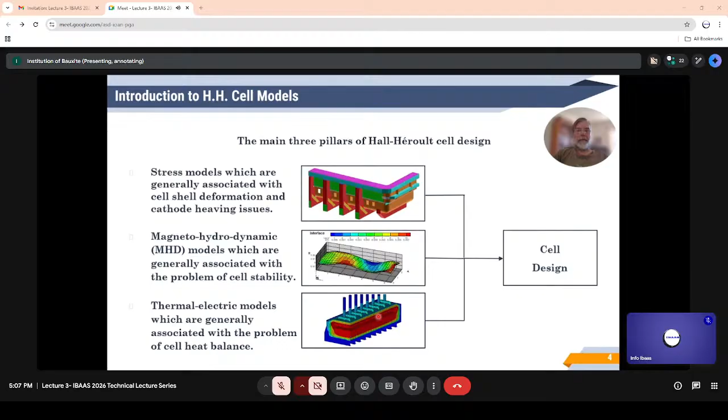And also when we're creeping the amperage, normally we have to design the cell appropriately, the lining design, so that the ledge is remaining at the optimum position. Too much ledge is not good for cell stability, as the ledge tends to get under the anode, and not enough ledge means that we have a risk of having a red sidewall and eventually losing the cell through the sidewall. So those are the two main issues we want to address.

So the stability of the cell, so the noise level or the intensity of the voltage fluctuation, and the second one is the thermal balance to achieve a proper protection of the sidewall without having excessive ledge toe.

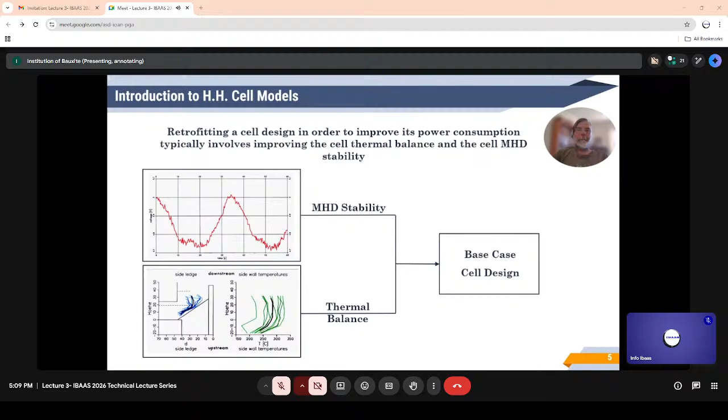And this is done with again the same two types of model, the MHD cell stability. So in my case, what I'm offering is the code MHD Valdis. And then the thermoelectric thermal balance model that in my case is based on ANSYS. And I will start soon to display the full series of models available.

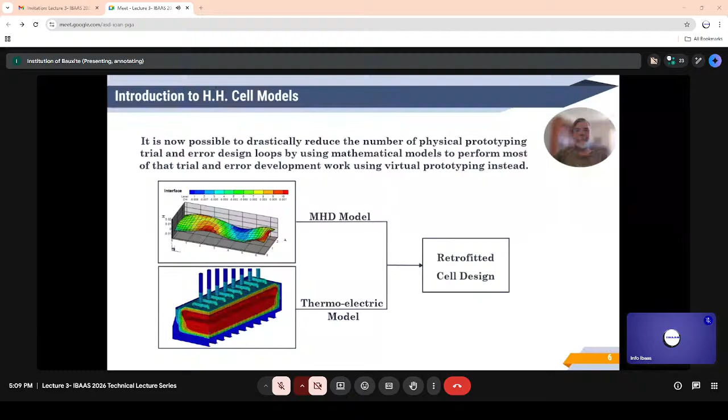So on the thermoelectric models, there are two big classes. There are the cell simulators. So Dyna/Marc is the code I have developed that I'm offering for simulating the dynamic behavior of the complete cell. And then there are those finite element based models, ANSYS is the name of the software, that are thermoelectric and are used to predict the anode voltage drop, the cathode voltage drop, the ledge profile, and the total cell heat loss.

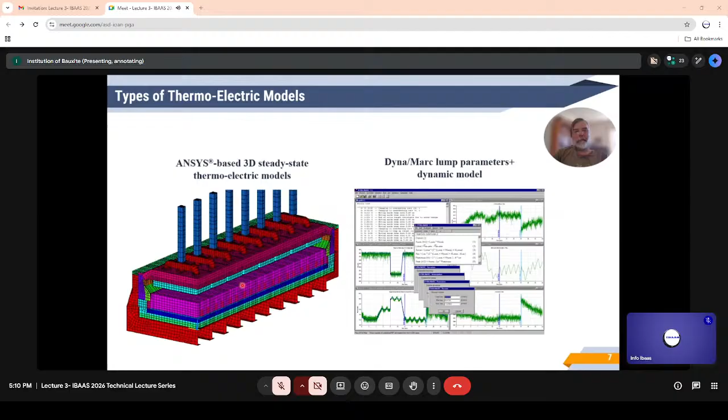So Dyna/Marc description is as follows. Dyna/Marc is a software whose core is coded in Fortran. That is a scientific language for coding equations. So there's a set of equations representing the process behavior. So equations to compute the cell voltage and then the cell heat loss. And the mass balance also, because we are feeding alumina, we are making metal, we are adding other material, changing anodes.

And the decision on when to move the anode to adjust the cell voltage is handled by the controller model, that is a coding of a cell controller, essentially. And then finally, there's an operator model where we decide when to tap metal, when to change anode. And all those three sub-models of Dyna/Marc are interacting with each other to be able to simulate the operation of a cell over a period of days or weeks, depending on how long we want to run the simulation.

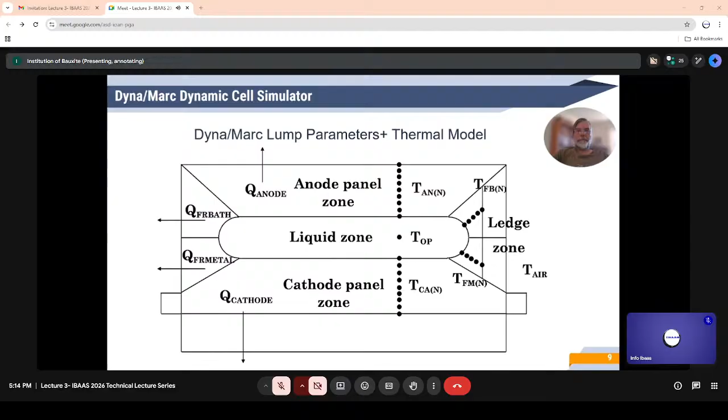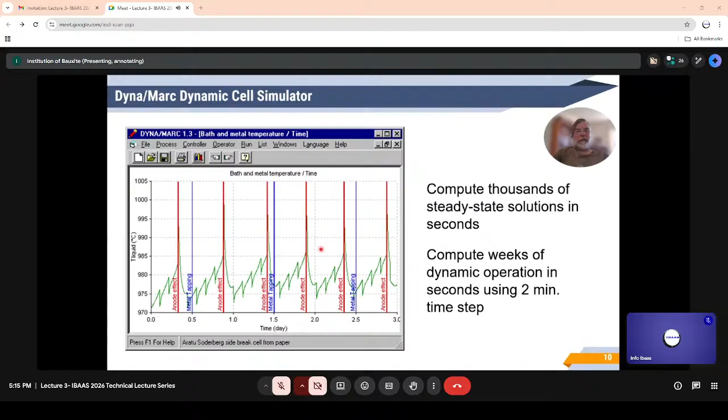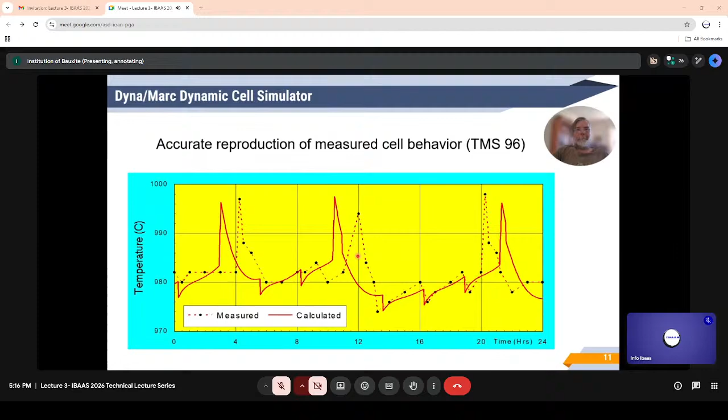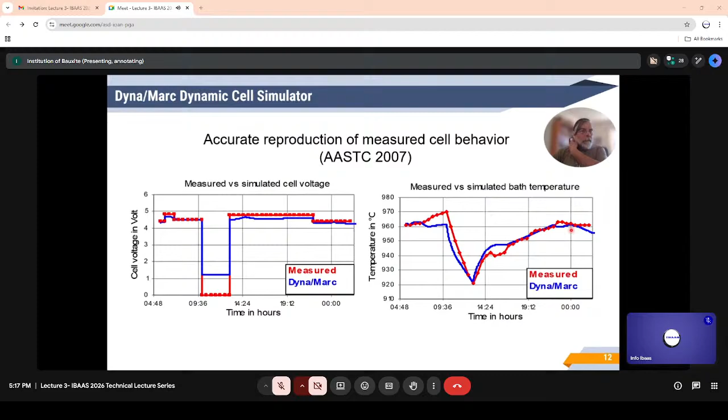So now I'm shifting to 3D steady-state ANSYS-based, so finite element based, thermoelectric models. This first one is the half anode model. The half anode model is accurately predicting the voltage drop through the anode, representing correctly the contact resistance between the cast iron and the carbon using a user-defined contact resistivity. And to be able to predict the contact resistivity directly, you need to go to a thermoelectromechanical model, which is not the subject of this paper.

And it calculates accurately the anode panel heat loss, calculating the heat loss of that half anode and then multiplying by the number of half anodes on the cell to get the total heat loss of the anode panel.

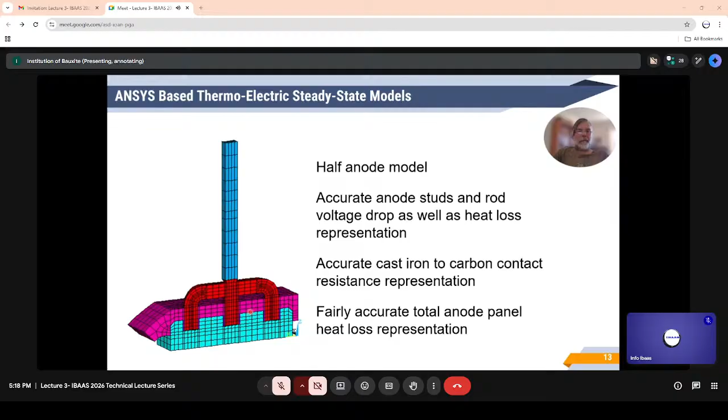Now, complementary to the anode is the cathode slice model. So it is a cathode side slice model representing typically half of a cathode block with one collector bar if there's two, or only half of one collector bar if there's only one bar in that cathode block. You have all the lining, and you have the pot shell and the half cradle.

And so that model calculates accurately the cathode voltage drop, calculates correctly the pot shell heat loss, so the heat loss from the pot shell and the cradle to the surrounding air, and it calculates accurately the contact resistance between the bar and the cathode block, again using a user-defined contact resistivity.

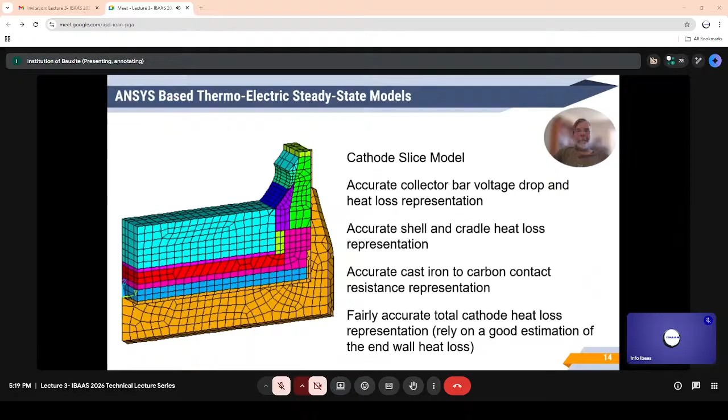If you merge the two, you get the full cell side slice model. So half an anode and half a cathode block put together, and this type of model can be used to converge the cell heat balance, because it will compute the heat generation and compare it to the cell heat loss for the operating conditions specified by the user. So the user decides on the amperage, the ACD, the anode cover thickness as parameters to the model,

and then the model will calculate the heat generated by those conditions, the anode heat loss and the cathode heat loss, and the total heat loss. And then if it's not matching, it will change the superheat of the cell, like a cell will react naturally, either increasing or decreasing the superheat and adjusting the ledge thickness accordingly to dissipate more or less heat, depending on the offset between the calculated heat generated and the calculated heat loss for a given iteration, and will converge to the steady state condition with the steady state superheat and corresponding ledge thickness and ledge profile. So this is the most convenient or useful model to use because it's doing all the work automatically.

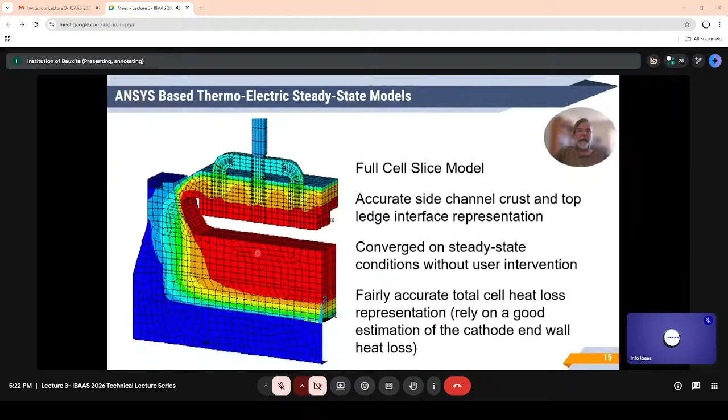The next model in complexity is the cathode corner, or if you extend, the full quarter. So the cathode corner, like it is displayed here. Here we have a corner model with only two cathode blocks. And what is important for this type of model is to predict the ledge profile in the corner, and also to get the heat loss of the end wall. If you only solve for the cathode side slice, you don't have any idea of the ledge profile in the end or in the corner.

At one point it is important to know not only what's happening on the side, but also what is happening in the end, and also the corner, which could be over insulated or under insulated. Typically it will be under insulated. It will lose too much heat in that corner because you have two faces to dissipate heat, and the ledge in the corner will get too thick, so you can correct by having more insulation in the corner.

And if you overdo it, then it will be over insulating the corner, and then you will lose the ledge there. So you have to have a balance, and that's why you need to study that kind of corner heat flux using a corner cathode model.

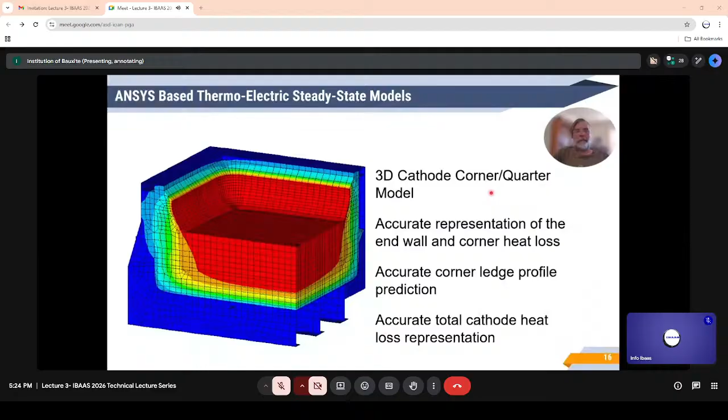You have the equivalent for the anode panel. You can have a corner or a quarter anode panel. So you can have, like here, 3 in the corner, or you can have the full quarter. And here, what you gain as additional information is the heat loss through the end wall channel. It's not that much, but it is important to be accounted for.

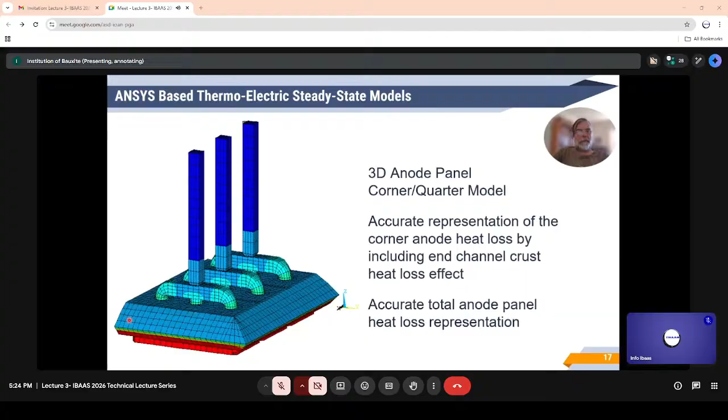The next level is the full cell quarter, displayed here. So you merge the anode panel, in this case the full quarter anode panel, and the full quarter cathode, to get a full quarter cell. And with this one, there's no need for any extrapolation; you're really solving 1/4 of the full cell.

And if you assume it is symmetric, because you neglect the effect of the flow, or you neglect the effect of the uneven position of the bath-metal interface, you solve for this quarter and then you multiply by 4 and you have the total cell heat loss. So this is of course very accurate, but it typically takes a lot of hours to solve.

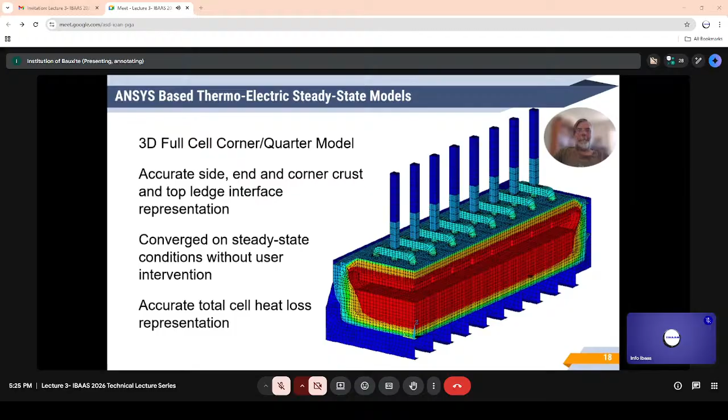The next level of complexity after that is here, a full half cell, and the justification to go to the half is that we have added the bus bar, which is not symmetric. So the bus bar can pull more current on the upstream or downstream side if it's not perfectly balanced, or not perfectly equally for each collector bar. So this then creates some asymmetry in the solution that we can solve here.

And in this model here, the liquid metal and liquid bath were added, not for the purpose of solving the steady state heat loss, but to be able to calculate the current density on the metal pad, considering the pickup of the current from the bus bar.

And the fact that the bus bar is there can also influence the cell heat loss. In a paper that was presented recently by Hatch and myself, the bus bar has an effect on the radiation dissipation, and this creates some asymmetry in the solution.

Then the next level would be to consider the flow, and this was done also by merging data obtained from MHD Valdis with an ANSYS thermoelectric model like this one, where the heat transfer coefficient along the perimeter of the ledge is proportional to or affected by the intensity of the flow.

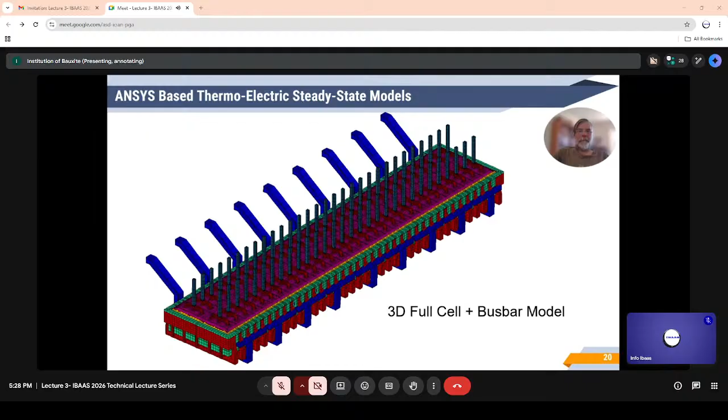In the opposite direction, you can want to be able to solve something quickly. So this is the fastest complete model that you can have. It is a 2D plus full cell slice model. This one is predicting the anode voltage drop, the cathode voltage drop, the anode panel heat loss, and the cathode heat loss very quickly, about 6 times faster than a full 3D cell slice.

But it is predicting everything almost as accurately, because the plus for the 2D is because those lines represent beam elements or 1D elements that are used to represent the stubs and the yoke and the stem and the collector bar. So it's 2D for the anode and the cathode lining, but 1D elements are added to represent the elements that are not really representable in 2D. They are the collector bar and the stub and the yoke.

So once it's developed, this model can be compared to 3D, and then we can observe that it's very accurate. It is solving much faster, and this is not so useful for steady state because we are getting very quick steady state in 3D. But it is useful because this can then be extended to run in dynamic mode, so transient solution, adding the time as a variable.

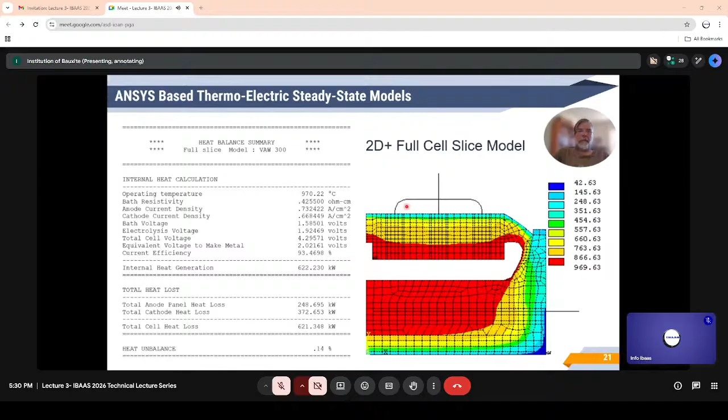So this is the list of the advantages, or what the 2D full cell slice can do. It is fairly accurate to predict the anode voltage drop, the collector bar voltage drop, so the cathode voltage drop. It is well representing the contact resistivity issue from the anode side. The cathode side is converging the ledge, and it is computing the cell heat loss. All of this very quickly.

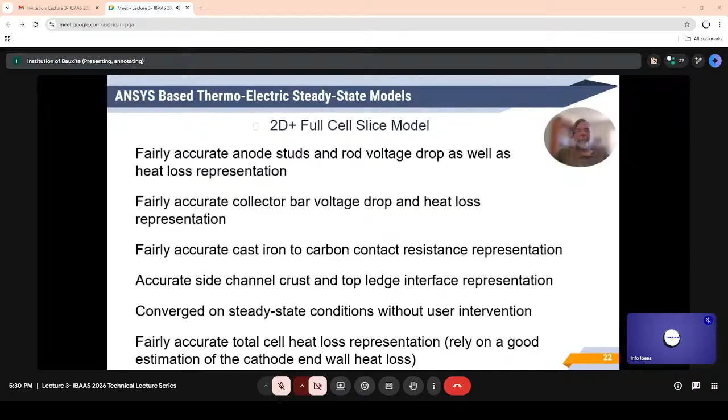This table is a summary of everything I tried to say about the different models. The classic I have not presented; it was presented in the original TMS paper. That's what was done before I developed 3D and 2D plus models. So the issue of time is important because the last one I'm gonna convert into a transient, and we don't want to wait forever for a transient solution. And so we have Dyna/Marc that is very quick, but Dyna/Marc is not as accurate as the 2D transient model.

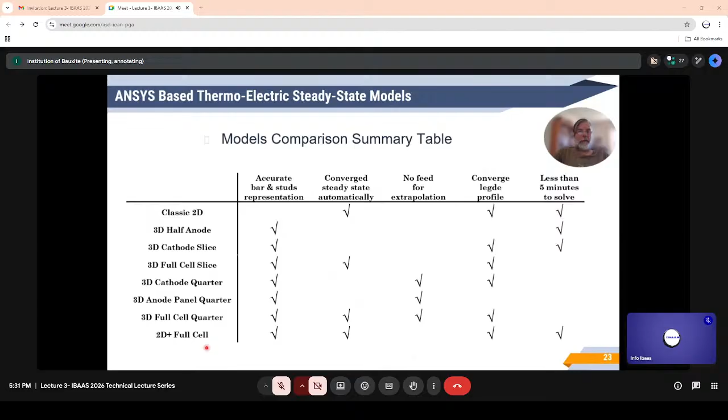So this is now the same model, but extended to be able to compute the dynamic evolution of a cell. All the equations from mass balance that are part of Dyna/Marc have been migrated to ANSYS. So this extended 2D plus full cell slice is now transient. It is solving for the addition of alumina, the mass balance, the production of metal, the thermal response of the cell if you adjust the ACD, if you have an anode effect eventually, or if you lost power. And this is the model that will be used to compute the power modulation event in the coming slides. So it is a 2D plus thermoelectric.

At the time it was first presented, it was running on the Pentium 2. And to solve 1 hour of operation, it took more than that to solve. So 1.5 hours of CPU time to compute 1 hour of operation, using a 2-minute time step to make the calculation. And that computer now would be considered a fairly slow computer. That calculation was performed in 1999.

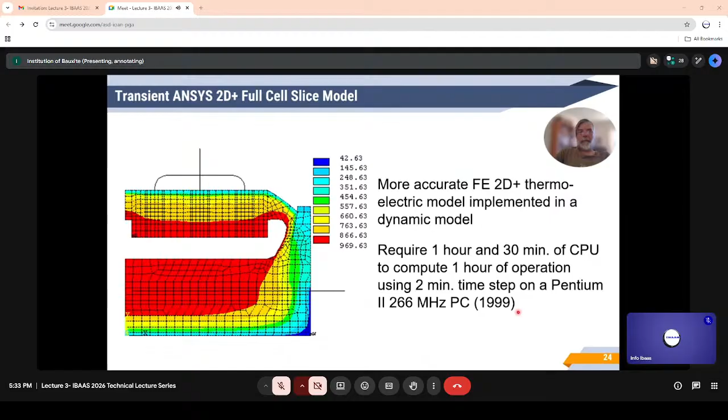So here I'm presenting the animation of this 2D plus transient model for normal operation. That means you have feed cycles, and since it's 1 hour of operation, we have a few feed cycles, and those feed cycles create some fluctuation on the operating temperature, and we can see a little response in the lining. It's very slight, so it's not obvious to see, but there's some fluctuation of the surface temperature of the cathode block and then the anode and the ledge that respond to the operation inside the cell.

So this first one is showing the full temperature in the cell, and we can animate the response. That is a very slight response for this type of full-scale temperature. One thing is sure is that nothing happened on the outside. The fluctuation inside will never reach the outside. So if we measure the heat flux on the pot shell wall, the feed cycle is not showing on the heat flux. It is completely absorbed by the lining itself. We need a major event to get the response from the outside surface.

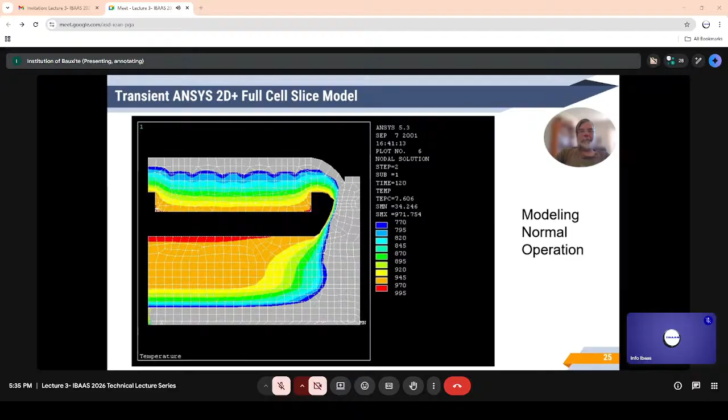To highlight this fact, it will now display, when I start the animation, the change of temperature from the initial steady state, or the initial temperature. So after some time, yes, there's a slight change of temperature. You subtract that new temperature from the initial temperature, and then you get an offset.

The ledge has been removed because the ledge is moving, so that's confusing the calculation, because we need to have a fixed point in space and then compare the temperature from the initial to a temperature after some time. And the nodes that are moving cannot be used to make this calculation, so they have been removed here.

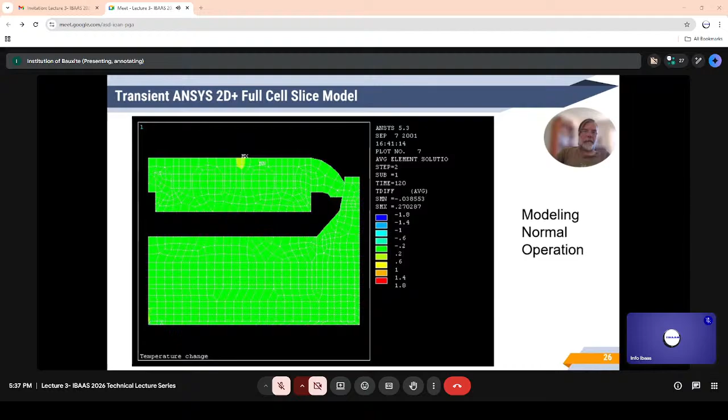Now we can present the result differently. We can present the evolution of the bulk temperature, so the bath temperature, over this 1 hour. So we have a feed cycle. The temperature was going up and then going down during the feed cycle. And this is the result of the 2D plus ANSYS model.

And the other three curves, two of the three are on top of each other, but there are three curves there, are three versions of Dyna/Marc with improvement of the thermal model. So from a pure lump to an addition of some 1D diffusion and further improvement to get to the most accurate version of the Dyna/Marc thermal model. So we can see that Dyna/Marc is predicting similar behavior but not matching perfectly the 2D plus model. This is for the temperature for 1 hour of normal operation.

And the next set of curves is for the evolution of the ledge thickness at metal level. For ANSYS, it is not a single value, it is an average of the thickness, because there's a variable thickness over the height of the metal pad. For Dyna/Marc, it's a single number. And you can see here clearly there are three predictions of Dyna/Marc based on the three thermal models or three versions of the code. And we have the fluctuation of the 2D plus model that are fairly similar but not identical here.

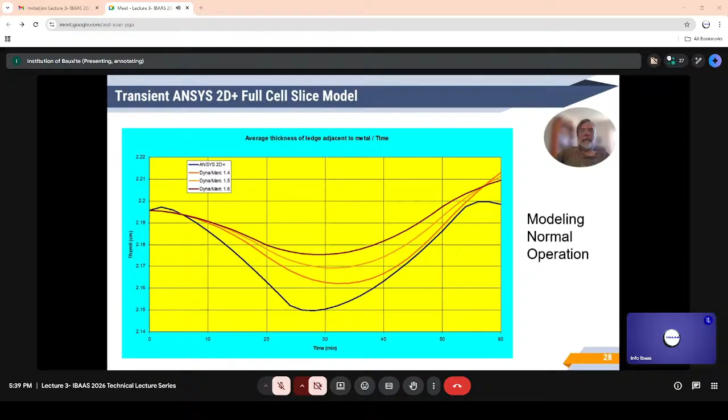So this is for normal operation. Now the next one will be a total power failure. So now we have the same model, but instead of running normal operation, keeping the amperage at 300 kiloamps for the full 1 hour and having only the feed cycle to get a thermal response, here we are totally stopping the cell amperage, so the cell is cooling down. As for the validation that was presented in 2007, but this time on my demo model, not on the cell that was stopped in Germany.

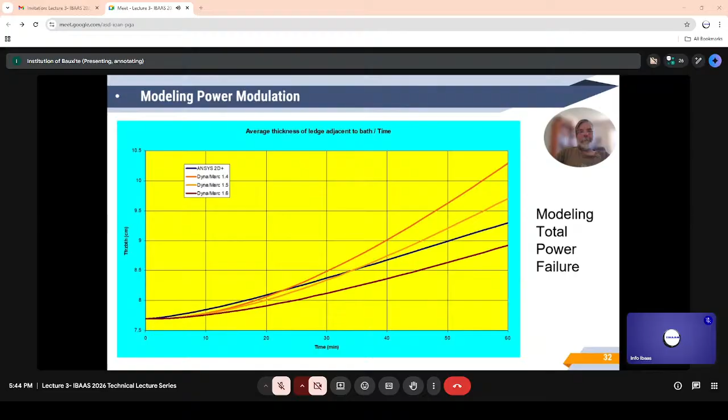But now I've reached the point where I'm modeling actual power modulation. So this one is a 1 hour decrease of 50 kiloamps. So 1 hour of normal operation at 300 kiloamps, 1 hour at reduced operation at 250, and back 1 hour at 300 kiloamps. So the 3 hours of simulation here, thermal response. So we start normal operation 1 hour, we have a power modulation minus 50 kiloamps, and then back to 300.

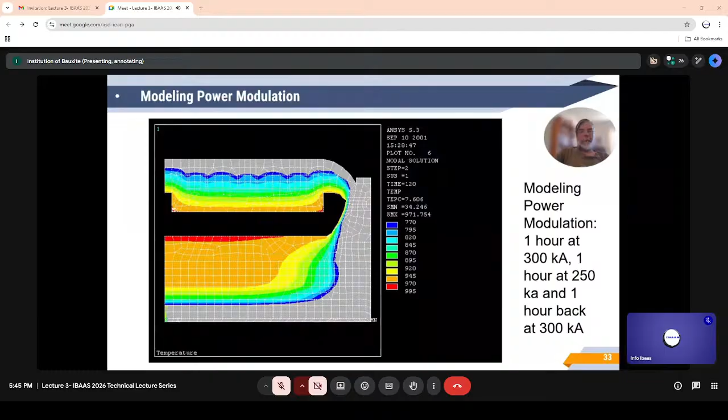So we have a cooling down from initial, and initially it is red like this on the cathode surface, we have a cooling down period during the power modulation, and then we are back to 300 where we are getting a return to the initial temperature after an hour back at 300 kiloamps. So if you look at the offset of temperature, the yellow is when we have like 1 degree or 2 degree difference on the cathode surface offset, and then after that it's going back to less than that.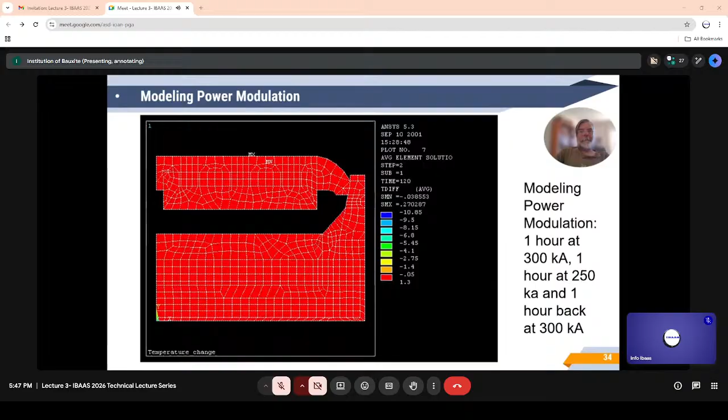So here we see the cooling curve. So 1 hour of normal operation, 1 hour minus 50 kiloamps, and then 1 hour back to normal operation, full 300 kiloamps, so that's the recuperation time. And after that 1 hour of normal operation, we're still far from being back to initial condition.

And we can see the three responses from the three versions of Dyna/Marc and the response from the 2D plus, for the temperature and the ledge thickness. So the first two are off, while the third version, the final version, is quite close in predicting the evolution of the ledge thickness. So this is a simulation of power modulation using two tools, Dyna/Marc and the 2D plus ANSYS thermoelectric.

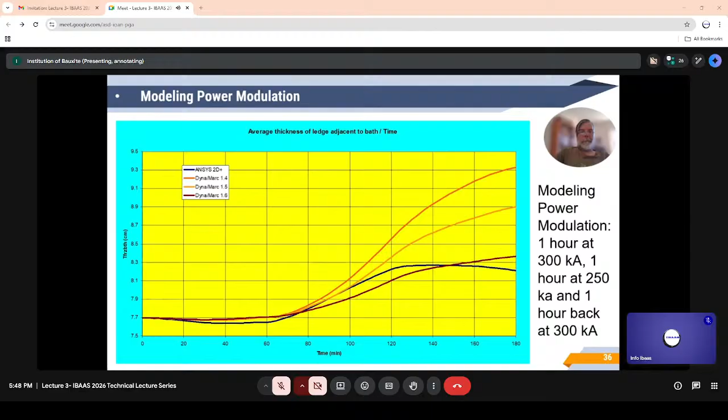So as final exercise, I will present something that people are maybe not aware is possible to do. I will modulate again 50 kiloamps, but this time I will correct the ACD to maintain the same heat generation. So I will give away some power, but not all of the reduction of the 50 kiloamps will be given away, because I will increase the resistance of the cell by increasing the ACD. The aim is to get no thermal response of the cell.

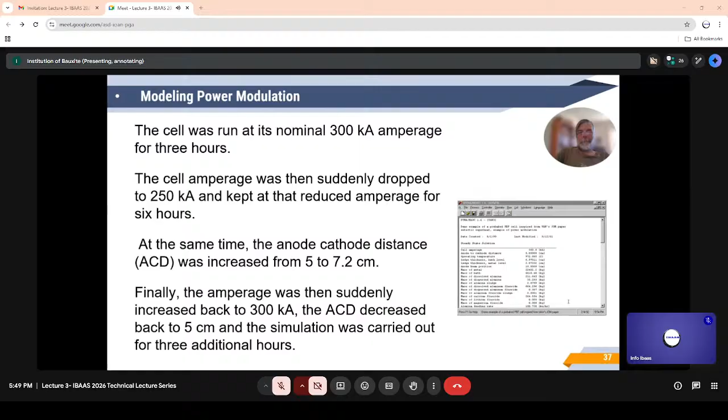So if you have enough bath volume and you want to waste your power by making heat to avoid cooling down the cell during that modulation, there's a way by increasing the ACD by 2 centimeters. And this is a simulation of this that I also presented in 2002. So this is the power curve. This is the operation at 300 kiloamps. You give away 50 kiloamps, but at the same time you increase the ACD by 2 centimeters.

So you're operating with less power. So this is the offset you can give to the grid, or that you have to pay only for this amount instead of the full amount during the peak hour when the power is more expensive. And you operate this way for 6 hours, and then you go back to the initial operation. So this is the power curve.

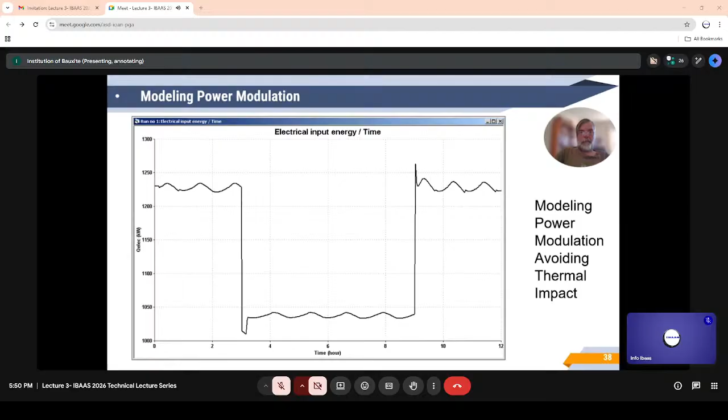The next one is the cell voltage, cell pseudo resistance curve. So this is the initial cell resistance target, adjustment of ACD here at the end of the cycle. And you have an offset of target resistance to have 2 centimeters more ACD. You operate during the modulation at this resistance, and then you go back to your initial target to get back to your initial ACD.

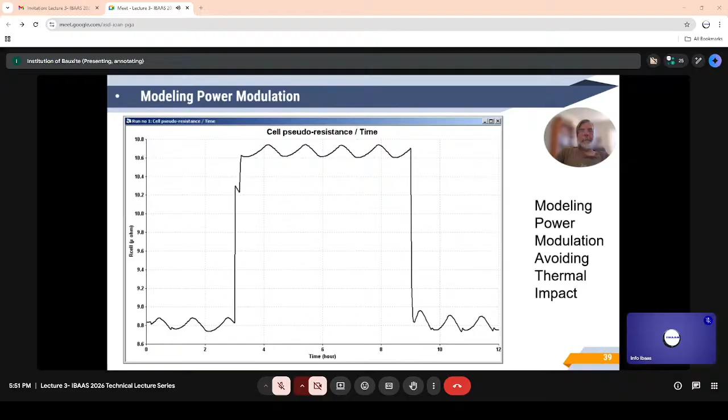So this is the thermal response. As you can see, it's completely invisible to the power modulation. All you can see is the feed cycle. That means that I have completely compensated for the reduction of amperage by an increase of cell resistance to maintain exactly the same cell internal heat. The penalty for doing that is in the next slide.

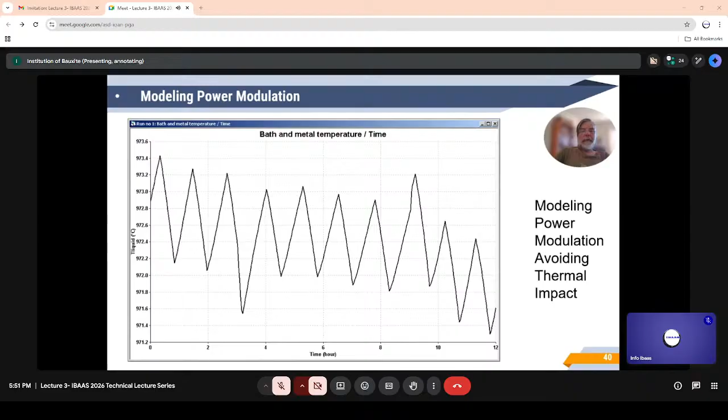The penalty is in the cell specific energy consumption that was already quite big because that cell, my demo cell, is from a VAW 300 kiloamp cell developed in 1992-93. So it is operating with a lot of ACD, so it's not very efficient in terms of energy consumption. But once you modulate, it's even worse because it's about 0.25 more. So you go from 13.75 to 14.

That's because you're making less metal, but you're wasting the same amount of heat. So that's why proportionally it is worse. But the gain is that there's no thermal impact of power modulation, but at the cost of producing at a much higher specific energy consumption.

The conclusions are that you can study thermal events 2 ways: with Dyna/Marc, which is very quick and can simulate long periods of time, even months of operation, very quickly. You can simulate a lot of events. You can do similar work with ANSYS 2D+, but it will require a lot more CPU time. Both can be used to study power modulation events.

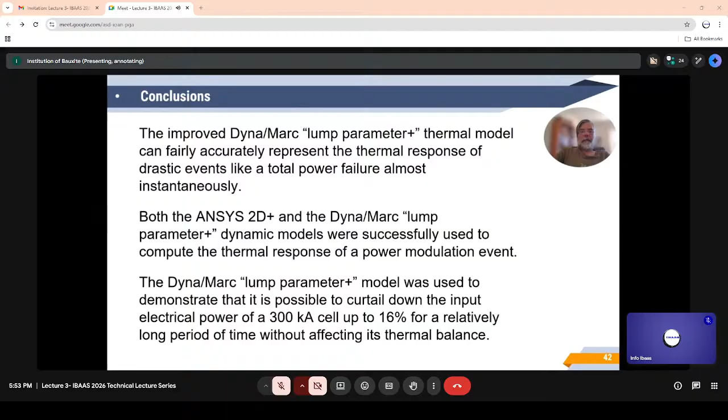Thanks, Dr. Marc Dupuis. This was a very interesting presentation, although I understand very little of it. So I will open for discussion. Please, you can ask questions to Marc Dupuis. Please, welcome. Yes, please. Give your name.

So there are 4 equations because there are 4 ways to dissipate the heat: from the bath through the anode up, from the metal through the cathode down, and then through the ledge at bath level, and through the ledge at metal level. So there are 4 equations and 4 values of heat loss, and the total heat loss is the sum of the 4 equations. Okay. And in the TMS paper that is available on my website, you can see the equations themselves are presented.

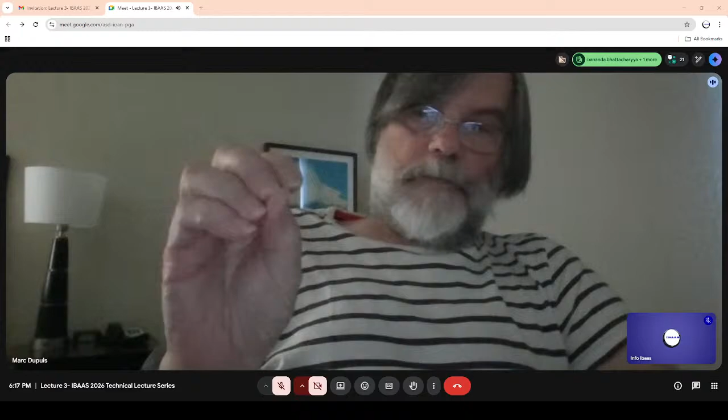And the tool that is used to synchronize is called a Kalman filter. It's comparing the prediction of the model with the measurement and adjusting the model state until the model matches the actual measurement. The model being synchronized with reality, you can call the simulation now a digital twin to that cell.

So you have to do this cell by cell, obviously. So it's requiring running a simulation of a cell for each cell in your smelter. Okay, that's really great news, because I was just wondering whether you have already done it. So it has been done in Hydro. That I understand now. It has been done in Hydro using a software similar to Dyna/Marc.

Me, I was not involved in that kind of work, but I know the thesis of the guy who did the work initially. So there's a thesis available on this type of work, and there's a patent. Hydro has a patent, but it was taken in 2011, so it may be obsolete already or close to it. So anyway, this is work done by Hydro, and it can be reproduced, but it's not easy work, because Hydro took many years of R&D to achieve this.

It will be great if someone presents something about this in the IBAAS. Well, I just presented a paper. I could present this, but it is Hydro. No. I thought in IBAAS somebody presents how to synchronize your model with a digital twin. That will be great. You have an expert.